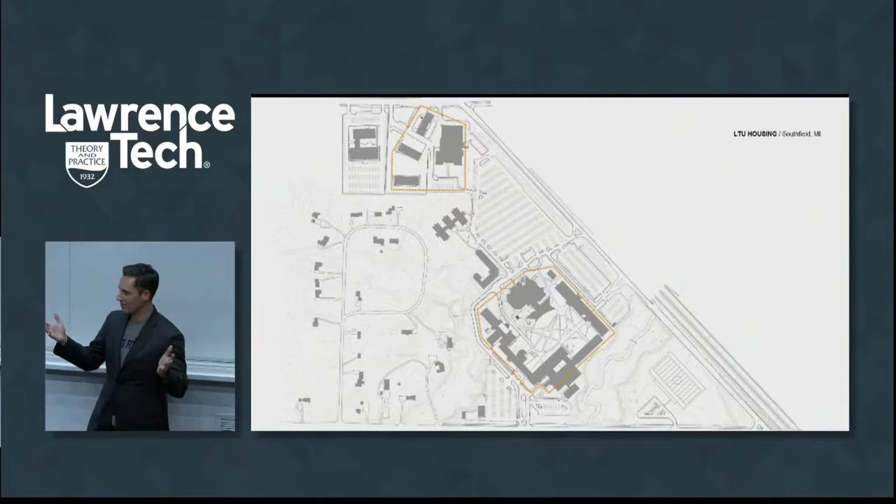But as you go through this, really start to think about what is the future and the process of how we make things. When we think about design, when we think about architecture, when we think about construction, when we think about fabrication, assembly, all of these types of things, you have kind of conventions of how these work, but it is changing, and it's changing dramatically. And what we find is that people like you have way more opportunity to make an impact on that than, say, people like me. I'm actually that age now, so unfortunate, but it's true. I'll probably refer to a lot of things in this that I'll say, I didn't actually do this.

I don't understand how this works, but here's the interface that helped me understand it. So to start with, I did promise that we would talk about the housing project.

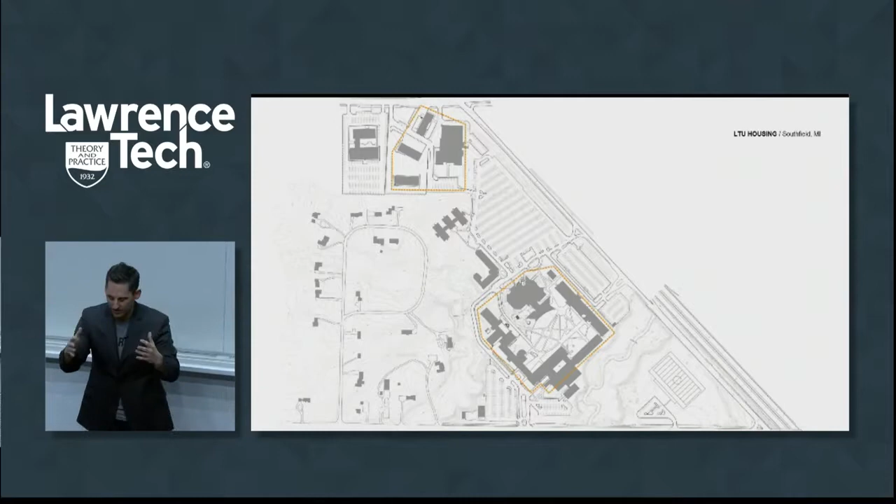Real quickly, just to set the context: generally speaking, when you're dealing with design and architecture in any kind of way, there's a three-part triangle to things. We call it cost, time, and complexity or quality of design. Usually those things have a reciprocal relationship. If the quality of design goes up, what probably happens to cost? It goes up. And if the time needs to be compressed, what usually happens to the cost? It goes up too. So usually these things have a reciprocal relationship.

Well, the ambition for this was we want to be in it in a year and a half. We need it to be really low budget, and we have a really ambitious design for this. So not exactly working with that triangle, but hey, we love Lawrence, and that was a great way to operate, and it was an incredible design challenge to work through. So what you're going to see is the process that got us where we essentially are, and then where it sits in construction right now and why.

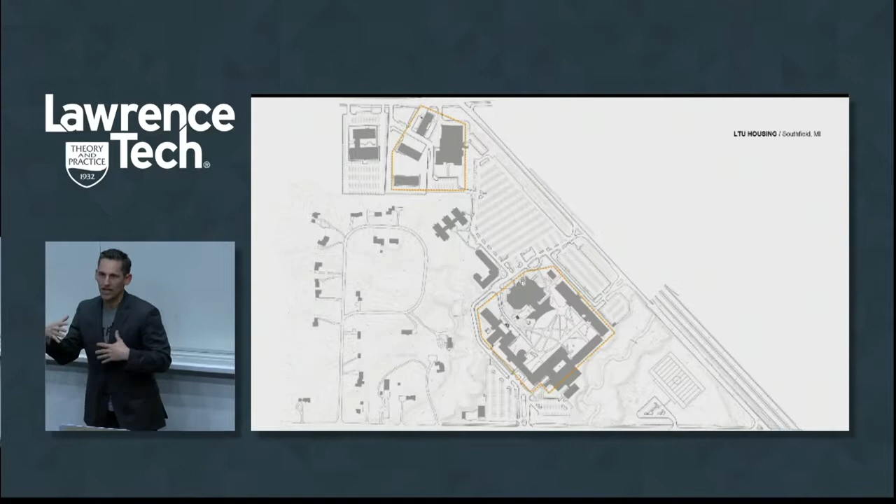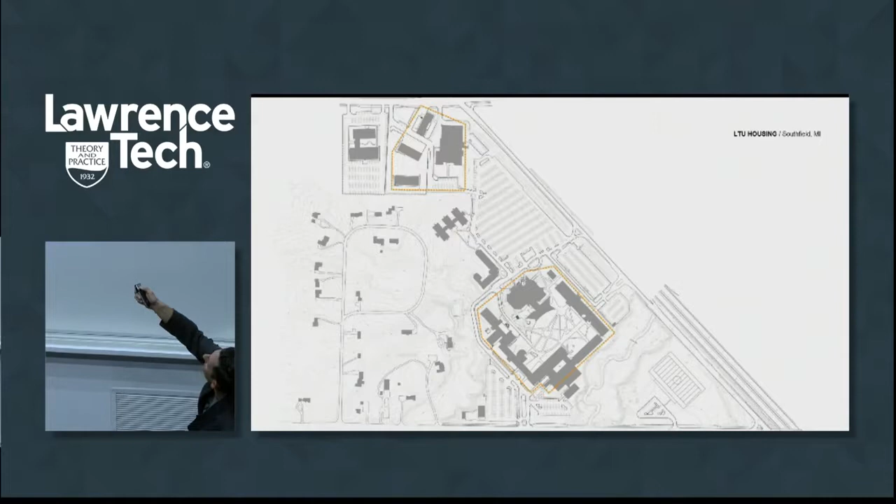To start, we really looked at two components of the campus that were important to understand. One was the academic part of the campus that everybody's familiar with. We called the other North Campus, or ancillary structures. With each of those, what you find in a figure-ground relationship is there's a really nice space that's sort of created within this. There's the potential for it here. But there's this area in between that we were really interested in.

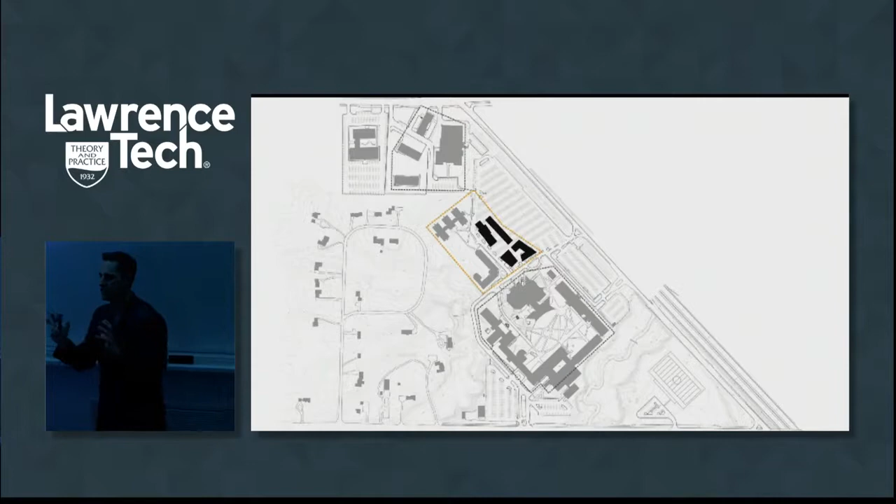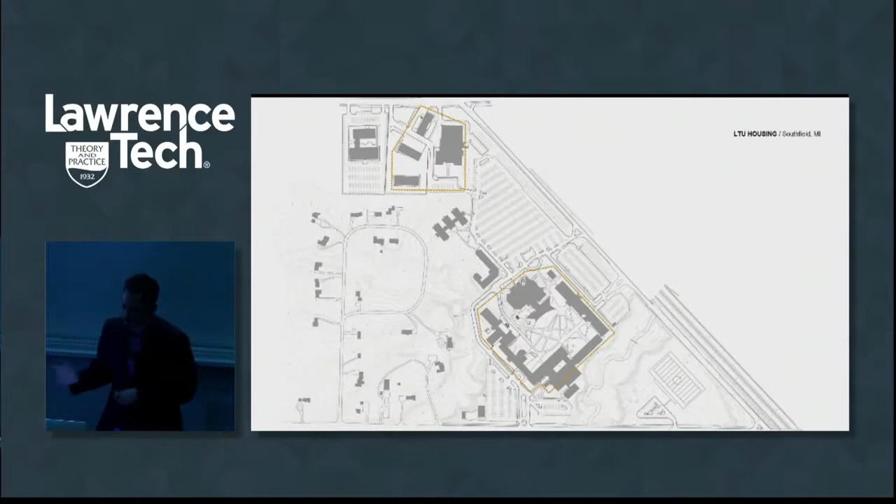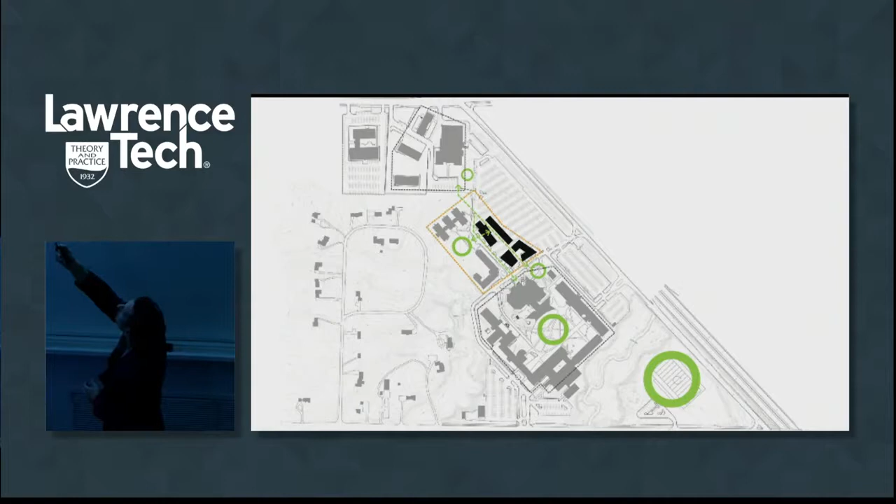That was the idea of, could you create a district for housing? So it's a housing district, not necessarily just two buildings. We looked at the idea early on that there could be a collection of buildings that would connect the academic campus to the future development of ancillary space to the north. The thought was that if we look at this linear relationship, there's strong connectivity from the ancillary part of campus to the academic part, happening through this housing district, and also creating a space for the district so that by adding the third building and creating a space, there's something shared as a kind of public, campus-accessible space within it.

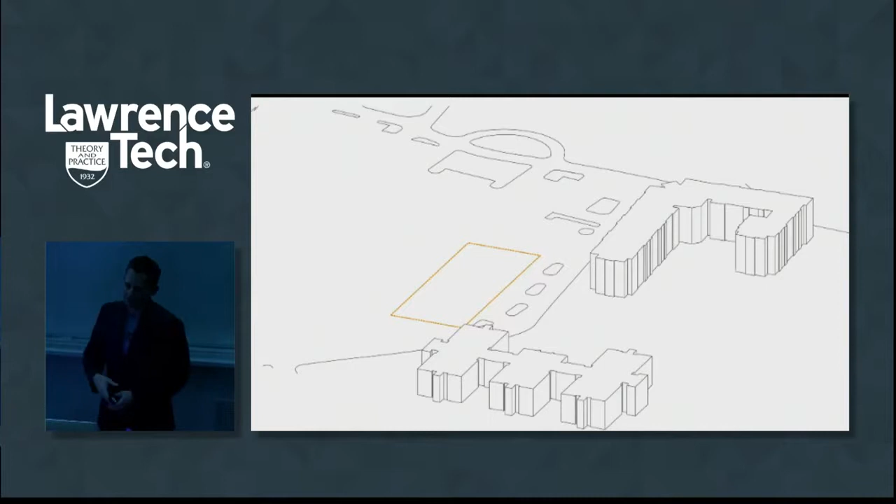So we started looking at locating the building in this area. The idea was that as we project and go vertical, it creates potential for a campus space within it. But we also looked at it being within the parking lot, so to elevate it, to give it a bit of a podium so that if I'm in a residential unit, I don't want to be looking directly out at parking. So give it a little elevation so it has a sense of privacy.

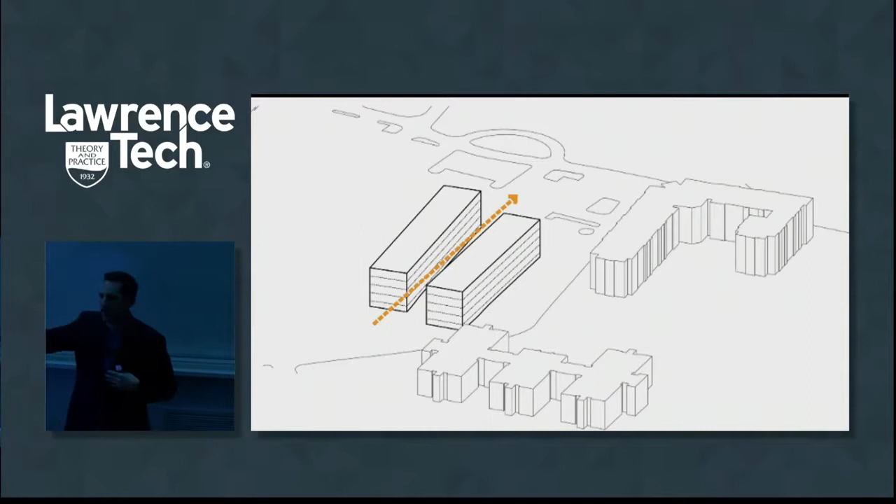And then we looked at the split. You don't want to feel as though it's broken, that you're not able to see or make the connection between the north part of campus and the academic part of campus. So this idea of a pass-through.

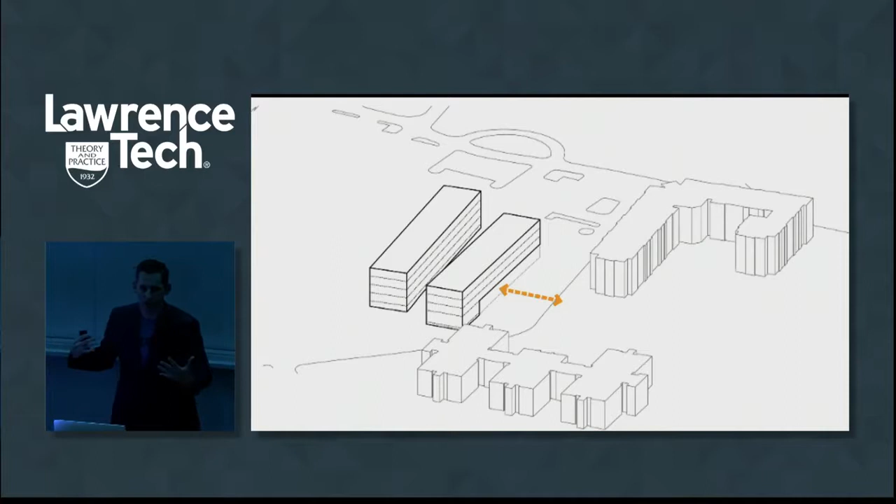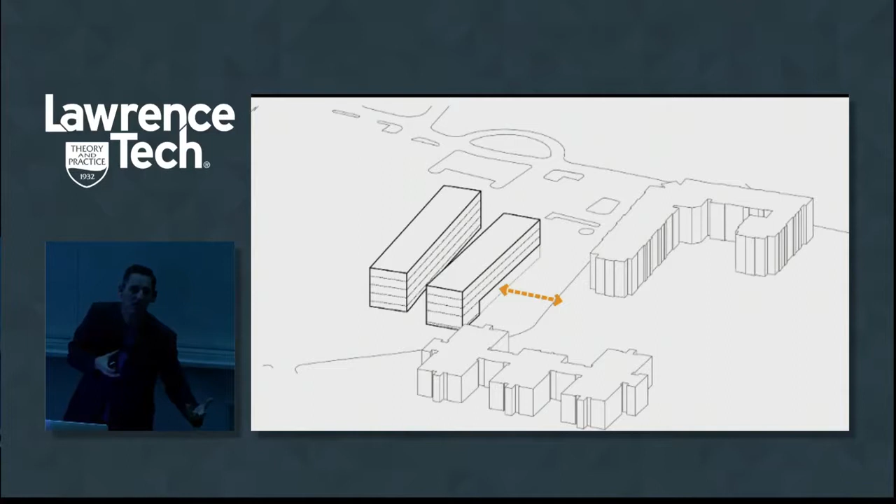The other condition that was really important is there's got to be a public component to this. In other words, if there's people passing by or it's a gathering space, how do we treat the first floor so it's not housing? It really feels like anybody can use this type of space. It's probably not a secret — the football team is coming, the marching band is coming, all these kinds of things. Maybe there's not as much access to the fitness facility. What are other programs we could put into this that could create a dynamic relationship that's a 'used by all' scenario?

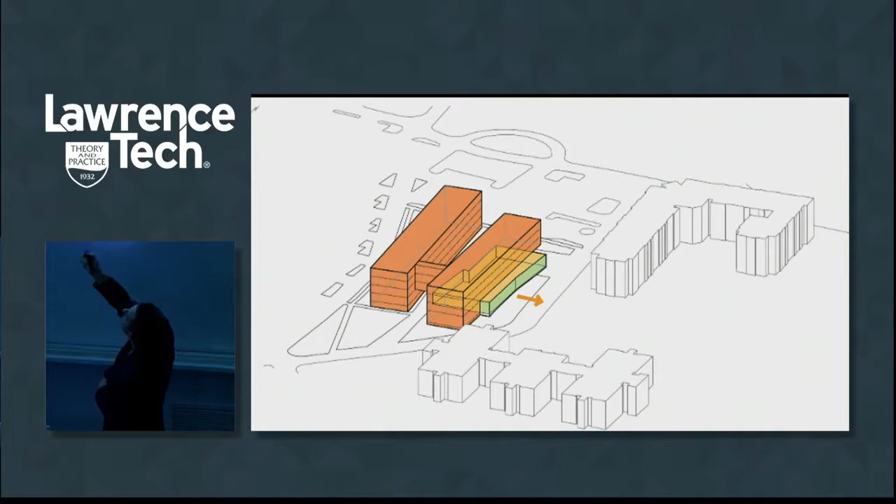That gave us the sense that we take the whole ground floor and accommodate it as a public type of space that can be used by everyone. Then the housing component of it comes in modules up above. I'll talk a little bit about the modules later — that became very important from a cost-conscious standpoint and really maximizing the efficiency of the housing project.

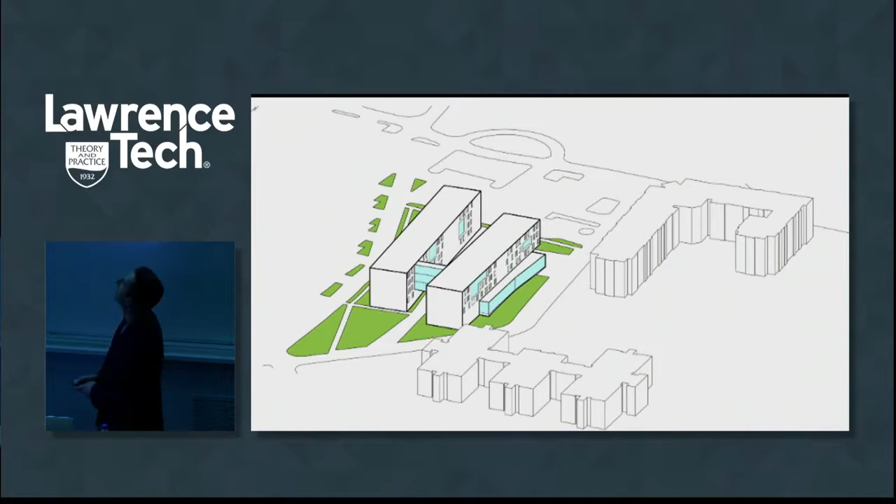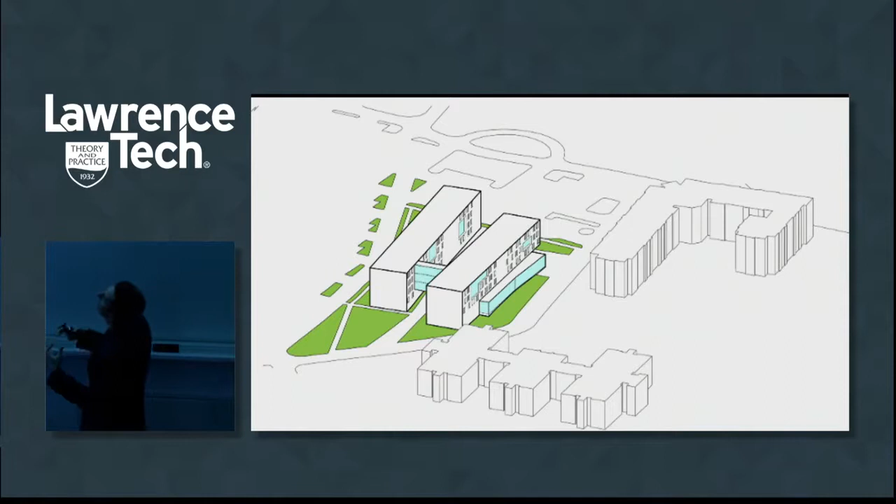From there, what was really critical is, if we're going to have these zones for circulation and moving through to make it campus-like, not vehicular-dominated, we looked at pathways within green space creating public settings so people could gather and move through, allowing the automobile to be more of an urban relationship at the edge, like on-street parking, giving it a more urban feel overall.

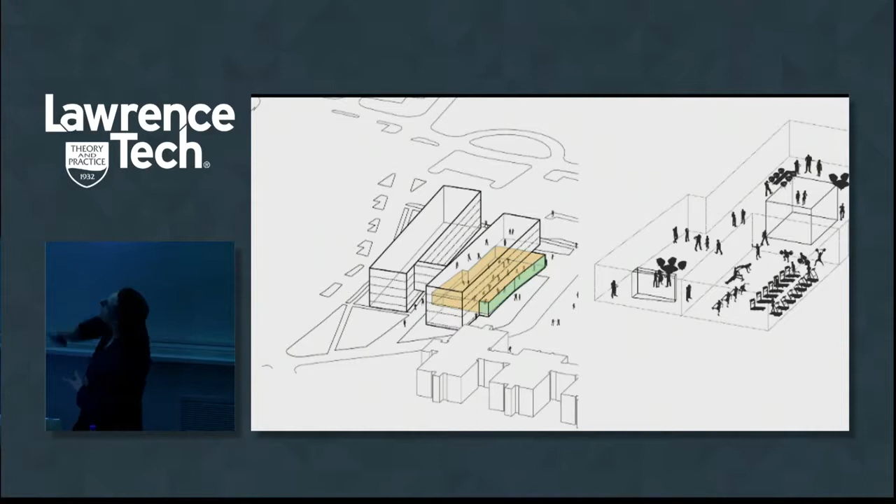We looked early at this idea of other programming on the lower floor—living room type space, cafe type space, fitness center type space. And then, how could we look at other community spaces within this, so that it wasn't just a dormitory but a sizable housing complex? Where are the places that community exists?

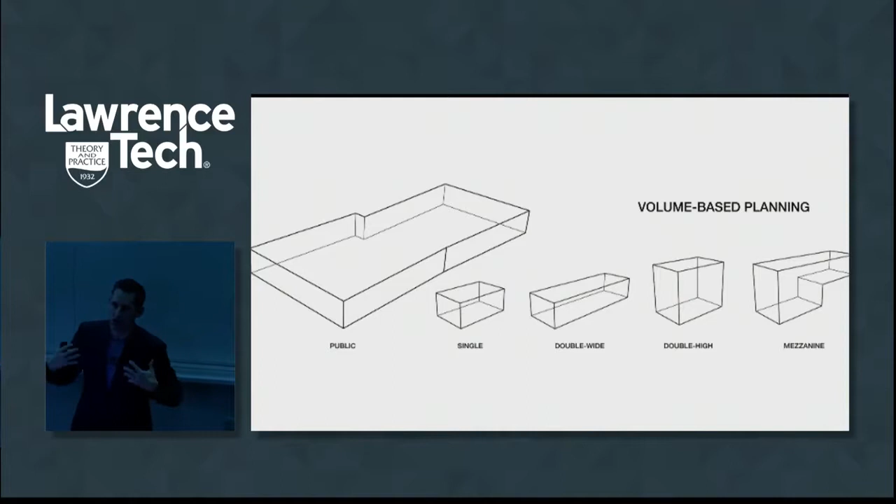So where we started with the idea of a larger public space, we could take bays in those modules and look at single, double-high, or mezzanine type spaces to create those within that.

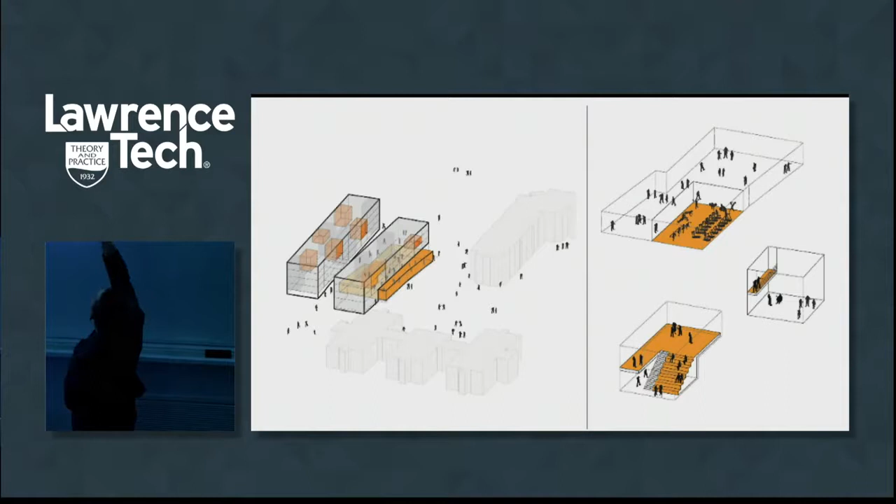So we looked at a series of programming we could analyze to give a lot of differentiation—reading rooms, game rooms, some more active like foosball and ping pong, some more passive like cards. There could even be a space like a cinema for showings, creating a dynamic relationship both within and external to the building, all vertically integrated so you have neighborhoods or groups of spaces between these zones.

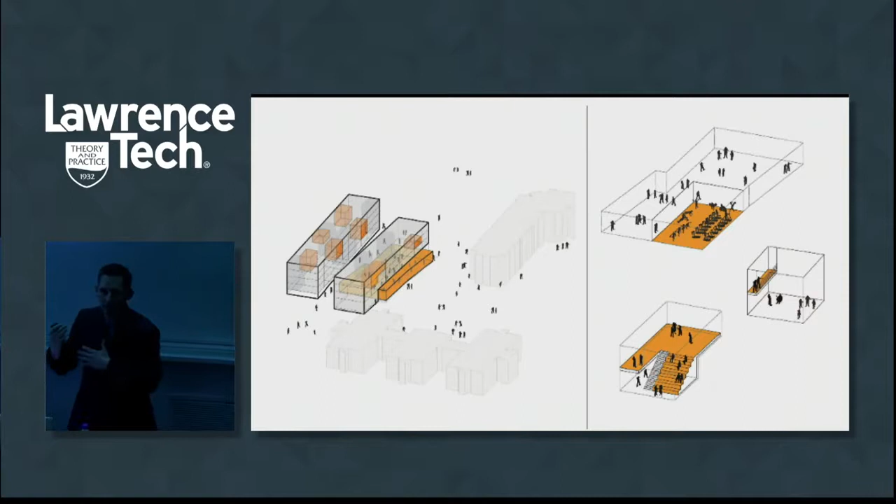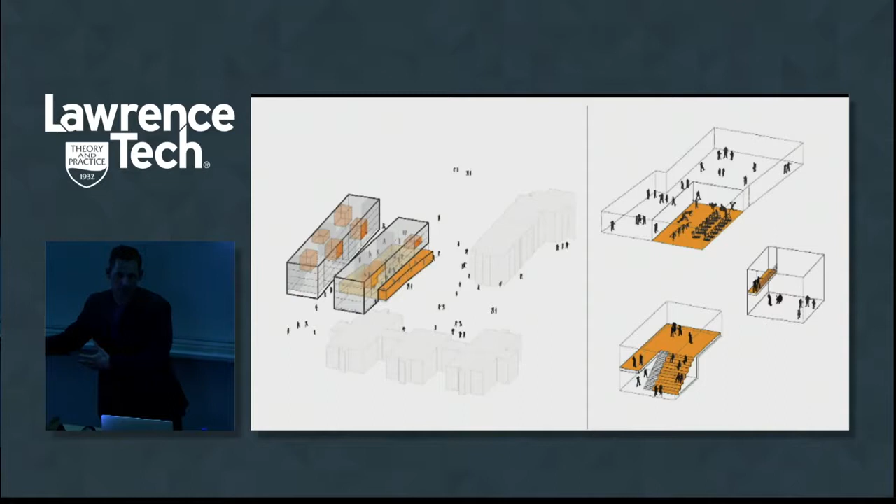It was always the notion that there's never more than 24 beds collected together—you want to know your neighbors, the people around you. So this is almost a city within a city, but with neighborhoods and districts particular to what's there, and the ability to traverse through the building. You might not just be in one part—if my room is here, I might go to the other bar to access the music room community space. So we also look at that from a horizontal plane.

Same idea—there's a whole public lower floor, but this is broken up into districts, grouped in terms of where the housing fits in. A real critical component early on was, if we're looking to maximize the efficiency of this, what is the module?

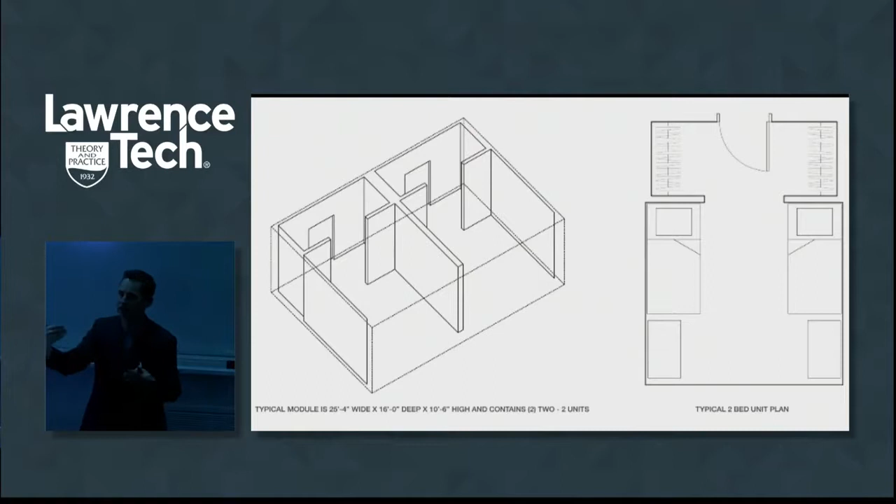This was a given in a certain sense—here's what's worked in terms of housing, here's the maximum size we want to give. So we said, okay, we're going to play with the Lego we were given, and figure out how to look at the assembly of this, but break down the Lego into exactly the proportions and criteria that are there.

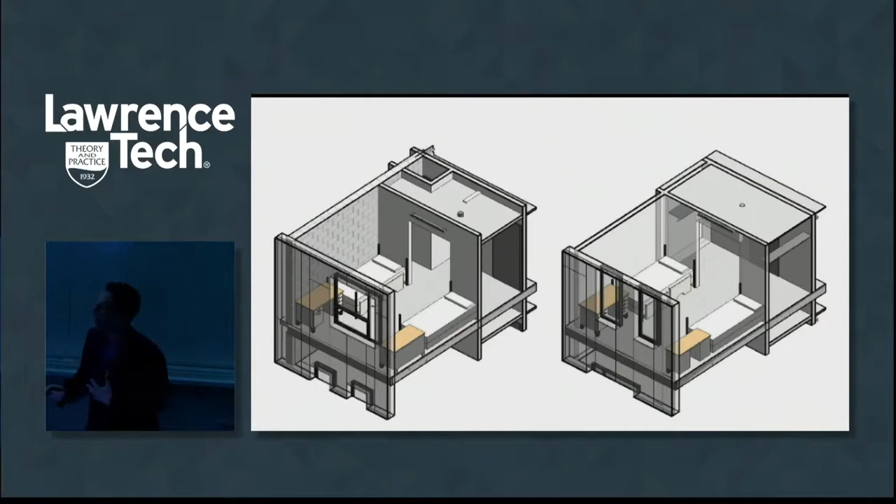Essentially it's 25 feet 4 inches wide, 16 feet deep, and 10.5 feet high, and each module contains two units—so you'd have one and two within this. When we look at these units, we look at them completely three-dimensionally, how everything fits within that unit, and that ends up being the core and the base.

We go back and forth, and this gets into what the future of design starts to look like. We had the opportunity to work with a studio doing computational design to think about how we use this as a tool.

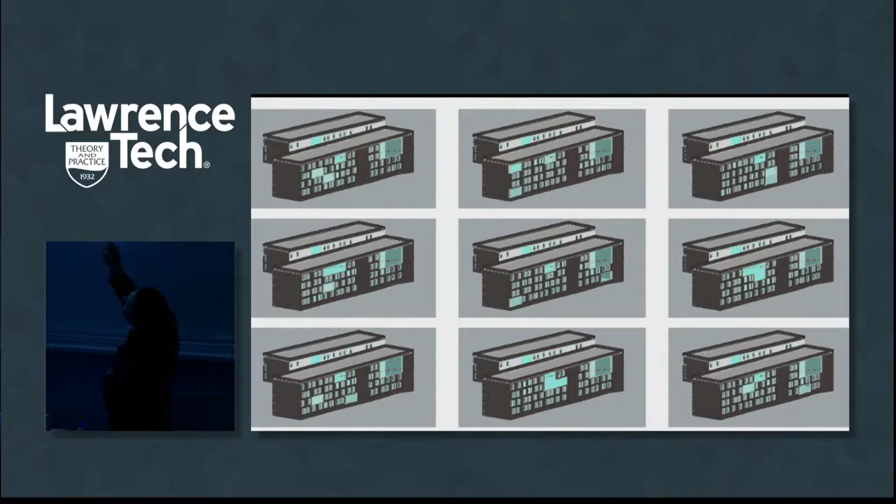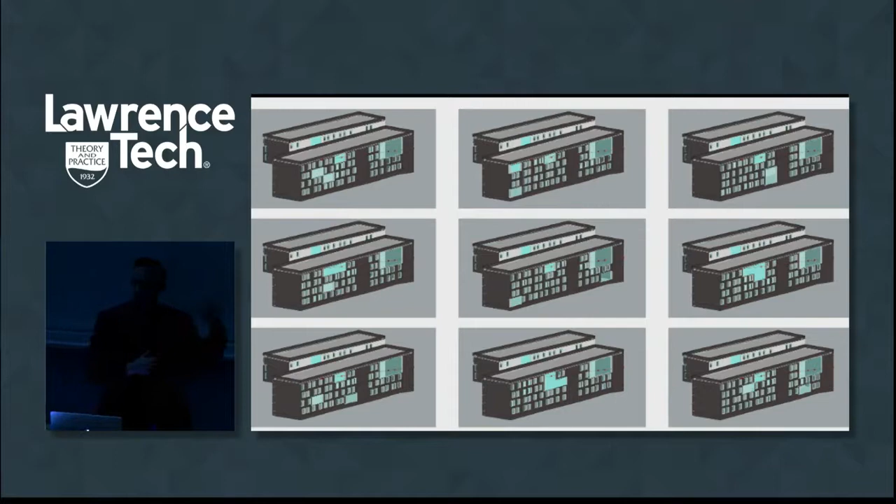We looked at many different iterations—the relationship between these units and the community spaces, how those arrangements work, what's the right proportioning, where they are, so there's dialogue between, say, the second floor, third floor, fourth floor, and the right approximation. So the sense was there was essentially—hopefully I can get this to run.

Went really dark, there we go.

There's a series of iterations with rules. We never move outside of this core or this core for a stair, but everything else is open for interpretation. Working through that, you assess the best places for these community spaces to stay, and from there, within the modules, we have the 25'4" module.

In order to be cost conscious, there are 2 types of windows: a more square window and a split. It's set up so that the right proportion relates the square windows to each other, a single and a double, within a 25'4" ratio.

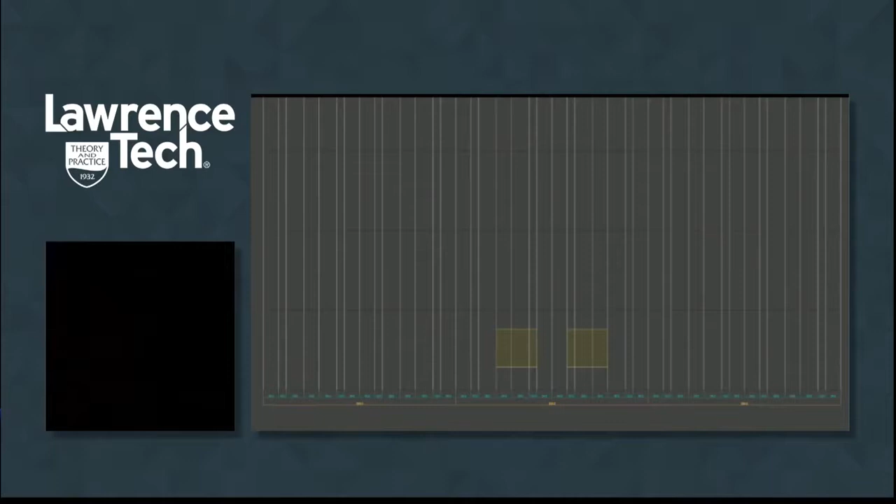If you look at all the vertical lines, that was approximated to right-size the metal panels, so there are only 3 different sizes of metal panels. We build in this rigorous system, and then we can look at the manipulations within it.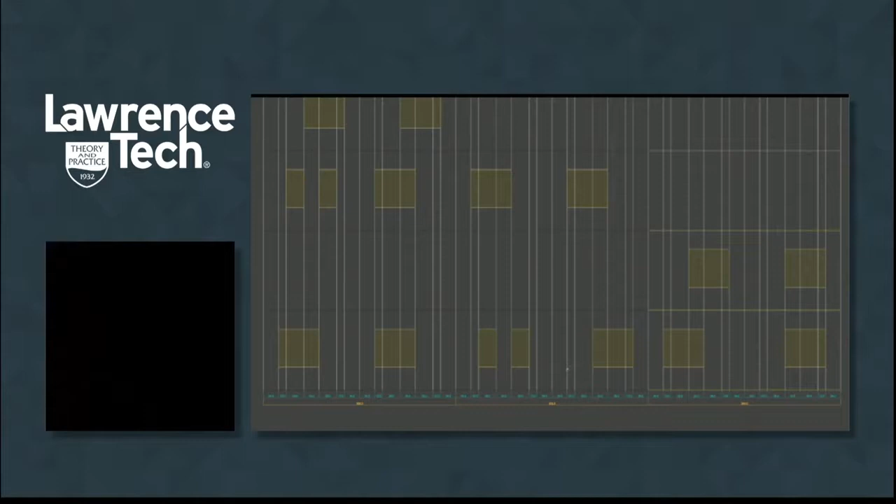You don't necessarily feel the reading of this hard grid, but everything is within this modularized surface, and we can apply that across larger areas to see the relationship and exploration that gives diversification to the facade.

From there, we look at the culmination or aggregation of all 4 facades. One important thing is that the modulation of those windows takes place outside or around what these community spaces would be.

This neighborhood can be modulated and moved apart in its direction, and each facade could be controlled in its own environment, subject to one another.

We can also apply parameters to these. If we need 60% window type 1, we can move the needle there. Or if a contractor says it's cheaper to go more of these, we can manipulate whether it goes up or down in percentage as we look overall.

We can also look at the amount of glazing on each facade and the percentage for daylighting. So there's a lot of modulation, giving you repetitive iterations where you take more the position of analyzing things than specifically designing one iteration after another.

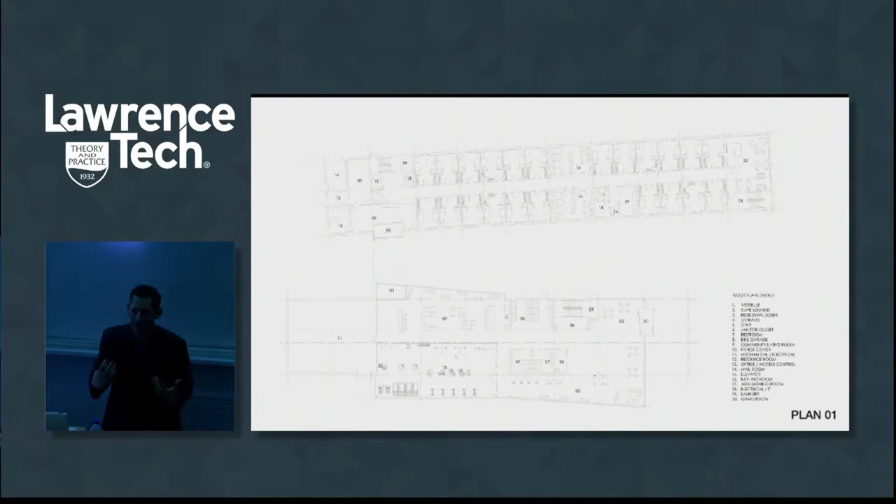This allows the computer as a tool to give you multiple things to evaluate, as opposed to just your priority or idea ahead of time. More importantly, we can put certain performance parameters into it that we can measure to look at how effective it can actually work and perform.

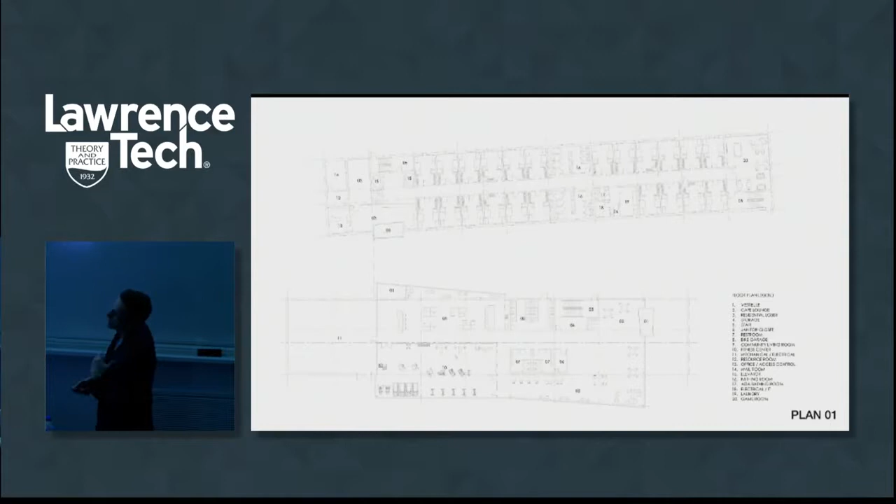We'll talk more about that, both in terms of cost and performance, as it relates to some other projects. Just quickly through the plan to give you a sense of the lay of the land—this is north in this direction, and the academic campus is in this direction.

The main entrance leads to this ground floor, which is the fitness center and public space. This is kind of residential space with kitchen and living-type spaces, then an entry off the courtyard that also goes into the dormitory. This is all at grade, but there's a small topographical change where, when you get into the housing, it's up.

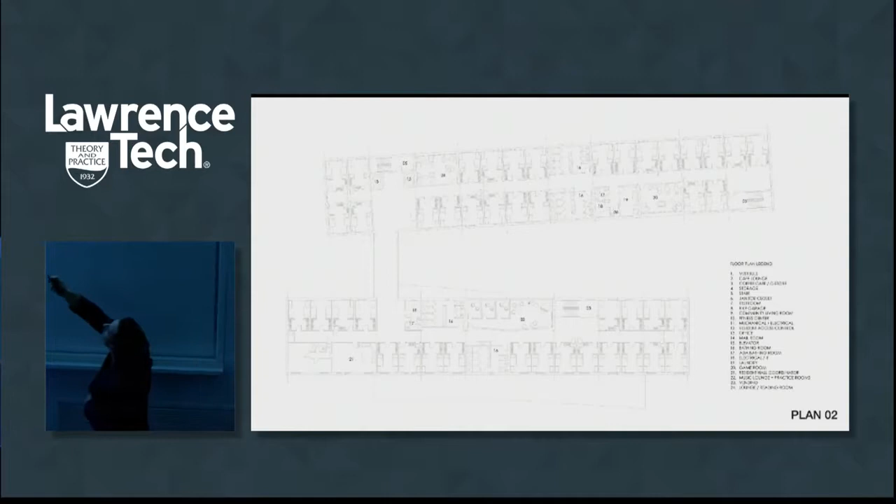The other important thing as we move up is looking at the community spaces as they sit within this—there's a lot of diversity in the types of spaces: music and individual practice rooms, collective spaces, game rooms, and reading and social spaces.

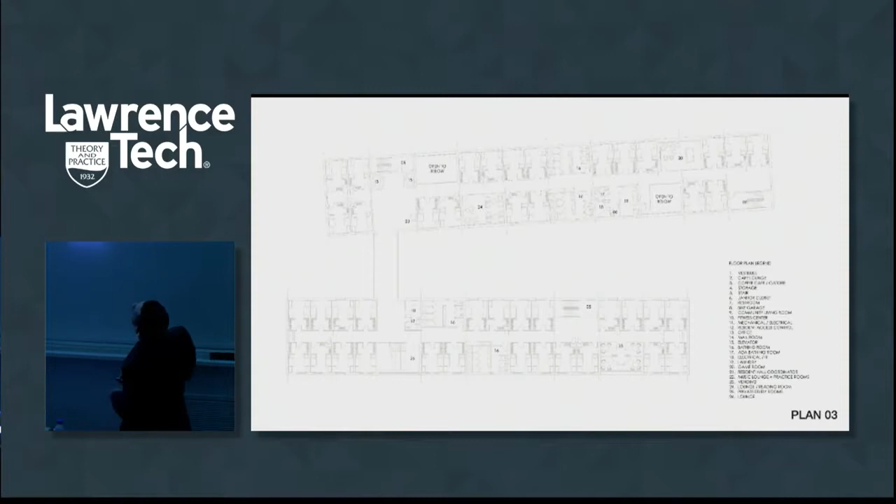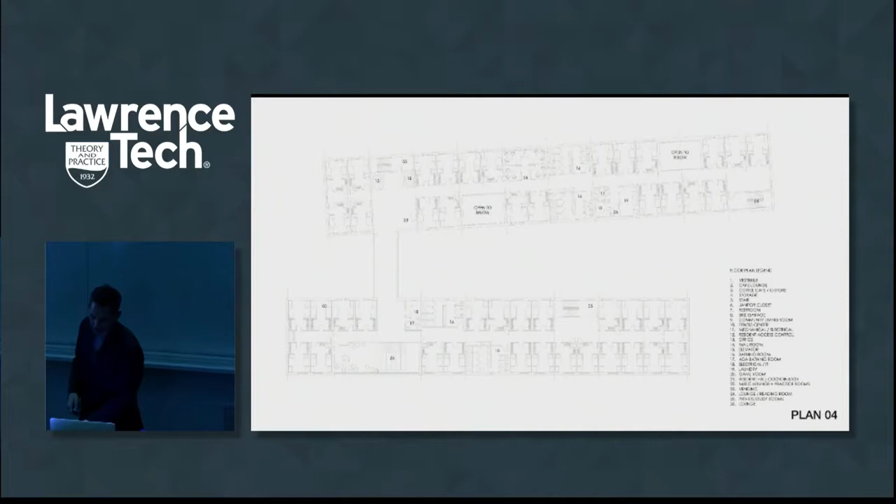The idea is that as you move up, you have an open-to-below so there are opportunities for the second floor to connect to the third and fourth. This becomes a critical piece, a larger span over to the mezzanine-type space that gives the terrace seating the ability to have films, lectures, any social events, and just hang out in that seating area.

Really looking at giving a bit of grandeur to the entry so it feels very public. The idea is that it would be all glass, opened up into that courtyard or green space between all three housing areas.

And then really denoting this idea of entry with these yellow boxes. The other thing you might see is we've treated the exterior envelope with a more cost-effective type of material, but it has this idea of enclosure. As it comes into the interior, it's more private, intimate, tactile.

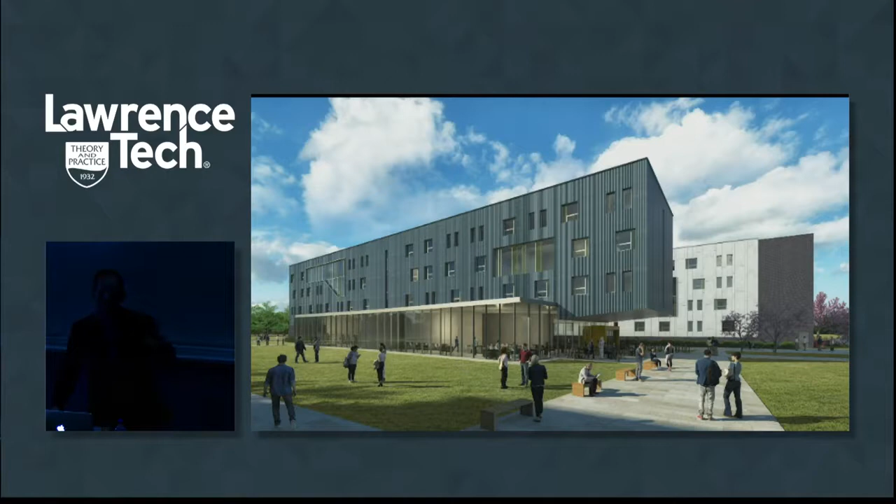So the material quality is raised a little bit, giving you a sense of intimacy within the interior. The cantilever - we'll talk about this - we were looking at structural systems and what's the most efficient way to do it. So you get the good and the bad. We show you the struggles and the things we went through as we evaluated this project.

When we first looked at this, we wanted to look at glulam timbers and CLT. Essentially it would be all wood framed all the way through, with exposure of wood within it. Interesting aspect is it would end up being columns and beams, allowing the planks to run in this direction, which means we're free as we go from space to space - we can move and we're not locked into something.

One of the things that's very interesting is we tried to competitively work structural systems in, and the timber was becoming competitive. But there are so many outside parameters that affect this. What was fascinating is as we got closer and it looked like we might be able to deal with the premium, it was actually the insurances on delivering and erecting the CLTs that ended up making it not cost effective at all. So sometimes beyond the parameters of what you'd even think, just because there's a lack of familiarity.

I think it's one of those things where we want people to understand the impact of how you have to make decisions, and where they are is sometimes outside of you - if you call a vendor or anybody else, the cost implications may not be as clear as you might think.

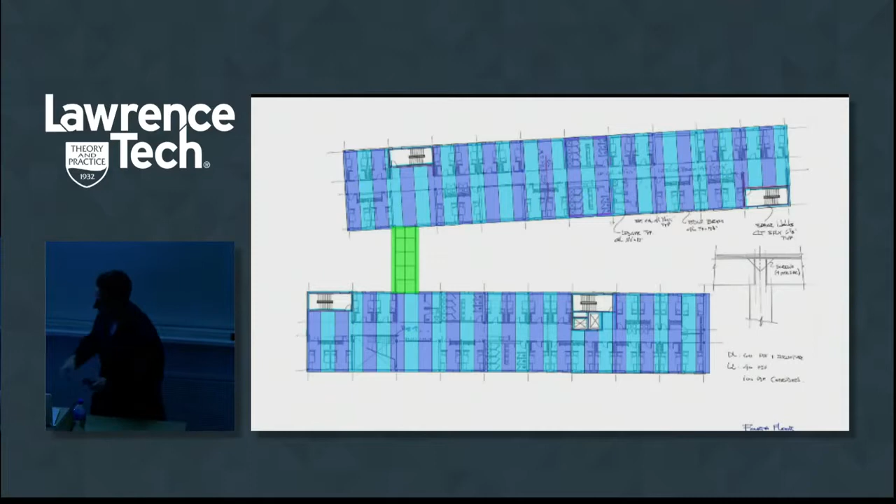Again, the idea that it spans essentially north-south, or east-west within each one of these walls. But then where did we have to go? The most cost-effective solution we ran into was block bearing walls with concrete plank. You see this a lot in different housing types. But this had to be a hybrid situation because that ground floor couldn't bear having all of the masonry walls in a regular pattern.

As we look at the erection process, you can't see it very well, but essentially from this point forward is all steel, and you can see the steel move up within this area. The reason for that is the cantilever you see on the end. So the structural steel moves up, and it was actually an intelligent idea by our structural engineer to look at plate girders on the roof, so we didn't have so much spanning and girder trusses within the fabric of the actual spaces being utilized. So it didn't inhibit door openings and things like that as much as we would generally see.

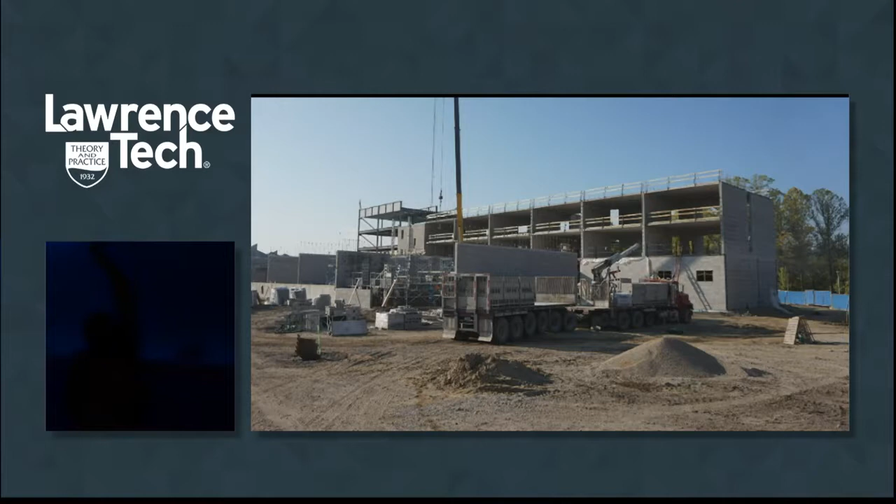And then additionally, you can see here's the modules that are broken up, and the idea is that there are two sets of rooms within each module.

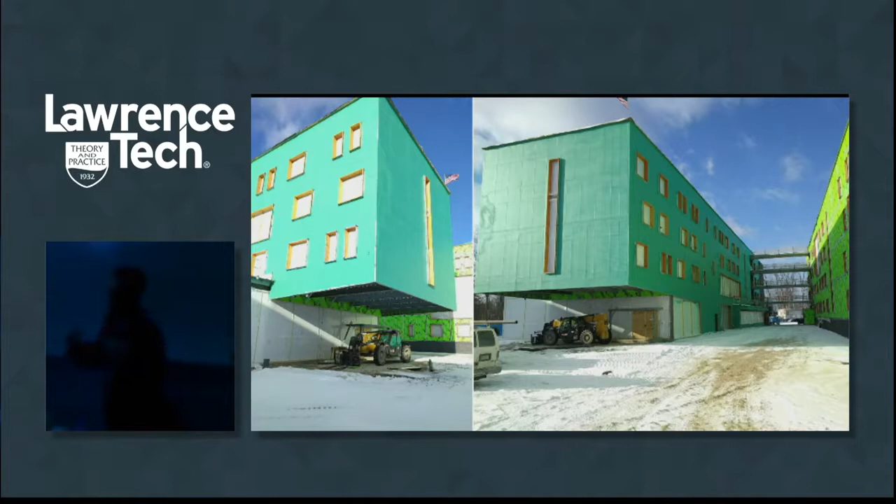Again, as it's starting to be clad, the girder trusses just disappear in behind it, but it gives us the ability to really have all of this being open, particularly so you have the ability to see into open public space, and it's very accessible such that you can have program space on the exterior - so you have that strong relationship between interior space that's used and exterior space that's used.

And then also that kind of transition as you go more towards the courtyard, giving you a very different read and feel within this. The idea was that it's not just a conduit to get from one part of the campus to the another, but also a place to sit and be peaceful and more serene. It was interesting because we were having a conversation earlier about what's the right kind of proportion or scale of this.

And as it's been erected, we think that it's come together very well in terms of a very intimate type of courtyard, but then also having a very interesting relationship between those public spaces that are then looking back onto that. It adds a kind of dynamic to it.

And then looking at even the relationship of, say, the very public space that's here, the music room that's within this zone, but also treating things service-wise like laundry so that you get the connection of, hey, this is vertically where all of these service things are kind of collected. So the laundry is, in a sense, predominant.

We're also providing natural light then into the laundry rooms that are there. This gives you a little bit of that sense of what the interior of one of these spaces might be, where there's rooms within this area, spills out to a common space, and then is open effectively to the floor below. So again, it's very strong in its conversational relationship from one level to another, so that the idea is that you're building communities, groupings of like 24 students, but then you also have the ability to cross-pollinate both on the horizontal plane and in the vertical plane.

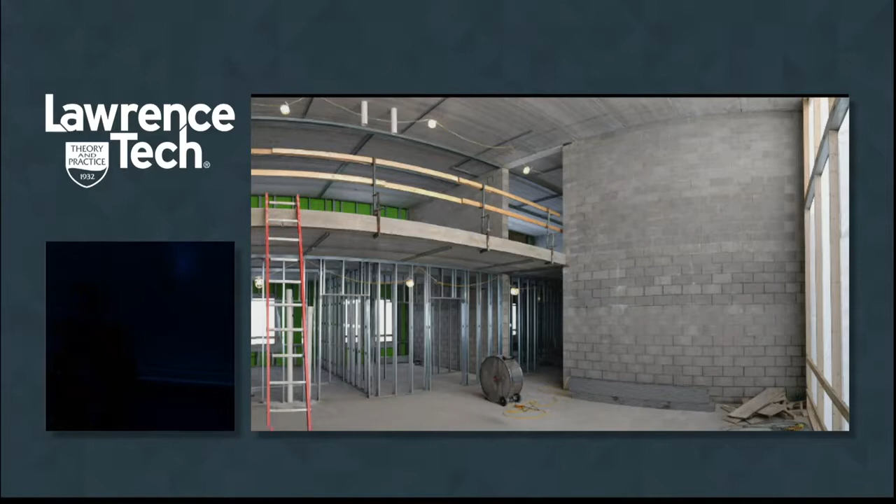This gives you a little bit of the sense of the intentionality of looking at a very active game type space. So it's more along the urban or southern edge of the campus. As cars are coming by or people are looking back, you can see when there's a lot of activity happening within that zone.

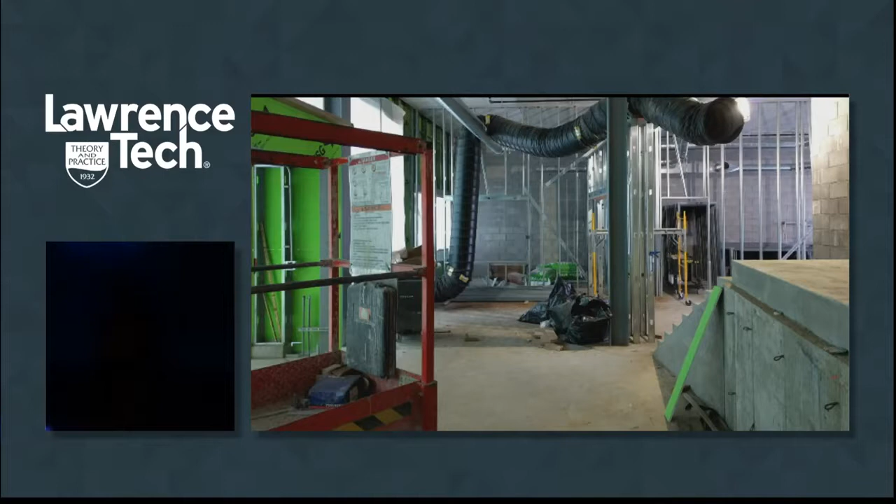At the same time, there's a little bit of elevation deviation there, and that affects essentially the entry, where you would come in at grade, a small stair effectively there, and you sort of stare up and have the ability to have that elevation change. You think of it a lot like the way row houses work, right? So you step up and you can see the activity that's all there, but you have that sort of private zone that you actually live and reside within.

And so you sort of read the base of where that exists, the idea that there's that very public active game space within this zone, a more passive game space within this zone that connects again third and fourth floor, the study type carrels that would be on the fourth floor, and then again a more private, quiet reading space that connects both the second and the third floor. So again, very diverse types of spaces that exist within it.

And then collectively, it gives a very strong reading to the idea of 10 Mile, of Southfield, or the service drive, so that people get a real feel of the activity of what's happening within the residence, while still leaving the individual rooms as very private things, because you're not seeing it at the scale of the individual housing rooms.

You start to see from a distance the more larger scalar components of the community rooms. And then really, the largest kind of community rooms speak to that kind of public space that's created on the west side, and then the dynamic of—you can't tell now obviously because it's Visqueen and not glass—how it would connect to that public space.

So as you're walking along, you're seeing the activity that's there: coffee bar, fitness center, kind of all of the activity that's really within that zone. And then again, coming back to the idea of that mezzanine space and what it means in terms of a volume that's effectively accessible. At the same time, it's still driven by this idea of the rigor of exactly what the structural system is, being the masonry walls and the concrete plank.

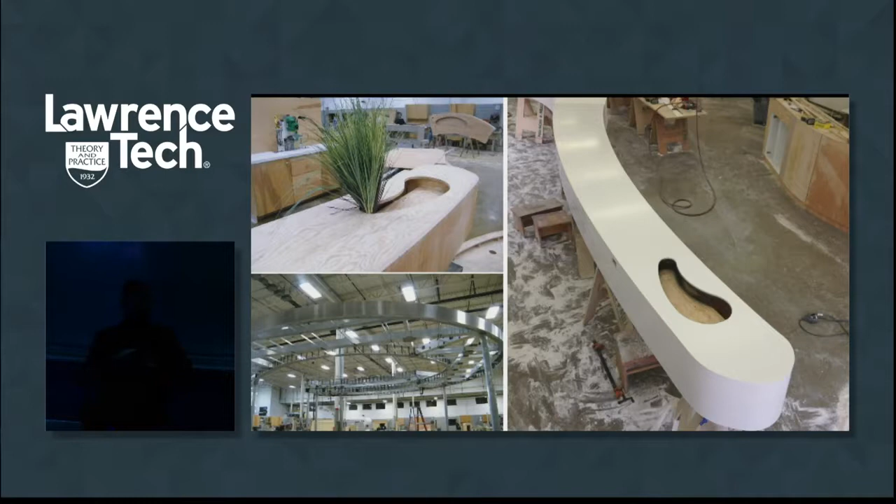So if you're familiar with this at all, this is the Illy Coffee Bar in the McNamara terminal. And this was kind of our first foray into really conceiving the idea of digital fabrication. I show this just to give you kind of our starting point for this. Effectively, this whole thing was sort of built within a factory, disassembled, and then brought back on site and reassembled.

So what are the advantages of something like this? Many, but in particular, you're building in a very controlled environment—I'm not bringing raw material out to a site and working within the elements. I have the ability of manufacturing tools that are there, clean rooms, comfort of people who are working there, eyes on everybody who's doing things in a controlled environment, as well as cost control within those.

I'm not subject to the elements and all of the things that are there, and there's an incredible level of accuracy within that. You're also able to work in a way that's much faster, so some of the obstacles that come in are related to delivery.

How are you dealing with the assembly phase of it? So we really look at it as there's a certain level of fabrication, and then the assembly goes in.

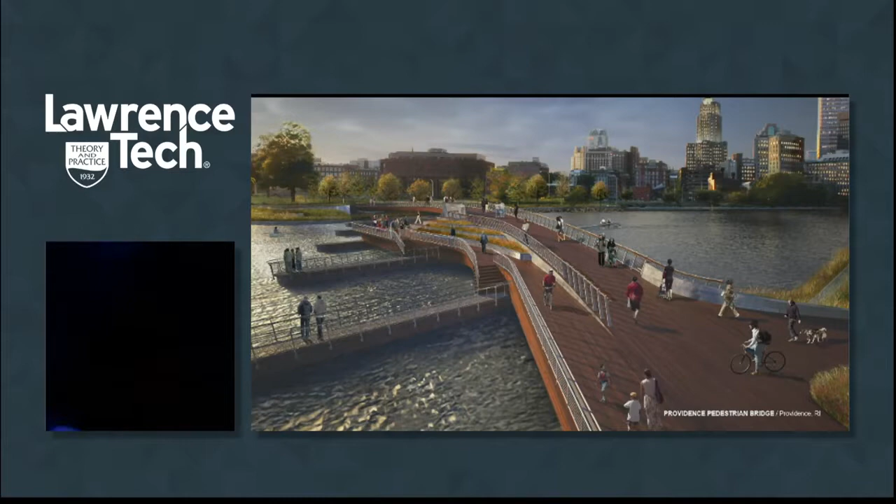What was exciting for us was to be able to scale this up, and this was scaling up a lot. This is the Providence Pedestrian Bridge in Providence, Rhode Island. This was actually a competition that we won in 2010, and sometimes, where time really compresses you, this gave us a lot of time to add things in terms of technology and thought process, how we would build.

So initially, when we looked at this scheme, I'm not going to talk so much about the design, but just to give you a sense of it, there was a lot of directionality. There's the east side of the river, the west side of the river. Brown University is over here, Fox Point neighborhood is here. They have the Riverwalk within this area they're calling the Knowledge District that they want to expand to, with a kind of proposed boulevard known as Dorrance, and then the Riverwalk here.

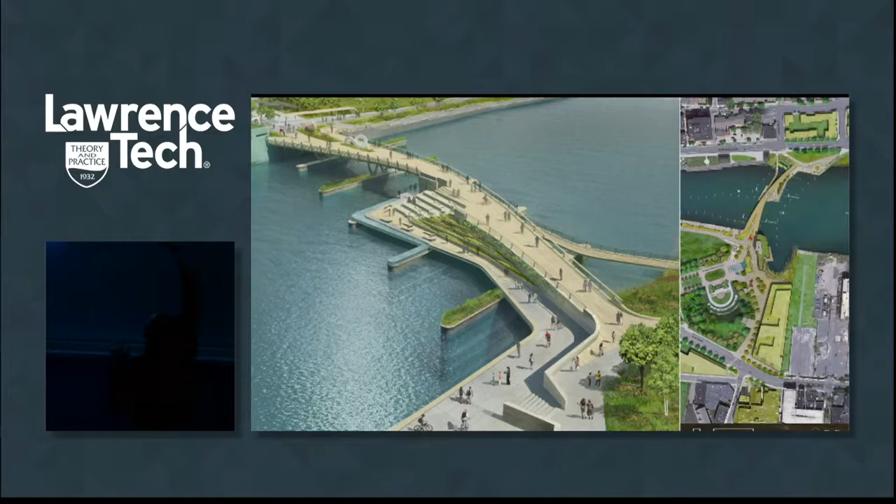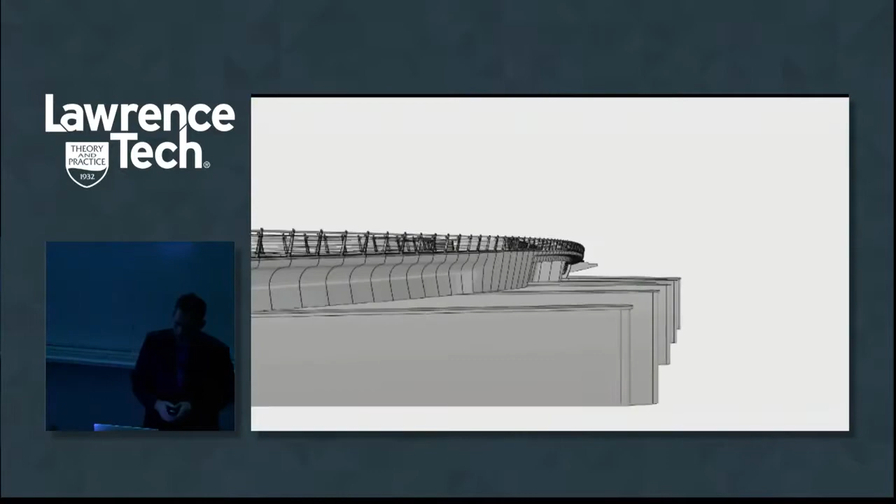So you get a sense of all the directionality that this thing wants to move, right? They also had this heritage of shipbuilding, making, and jewelry. So there was a lot of sinuous relationships built into the overall form of this, and then really working with the idea of wood.

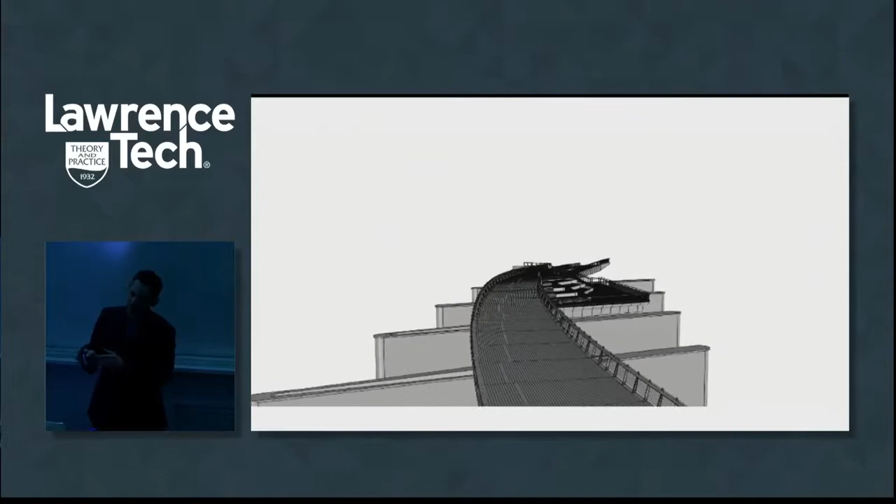So what this is illustrating is the overall model, done in Rhino. You get a sense of the sinuous nature of things, some of the complexities of double-curved geometries, so that it has a very consistent movement as you go from one place to another. It allows you to deviate in directionality and yet still maintain a holistic integrity. It never fractures, it never creases or folds — it's always a very sinuous movement and bend.

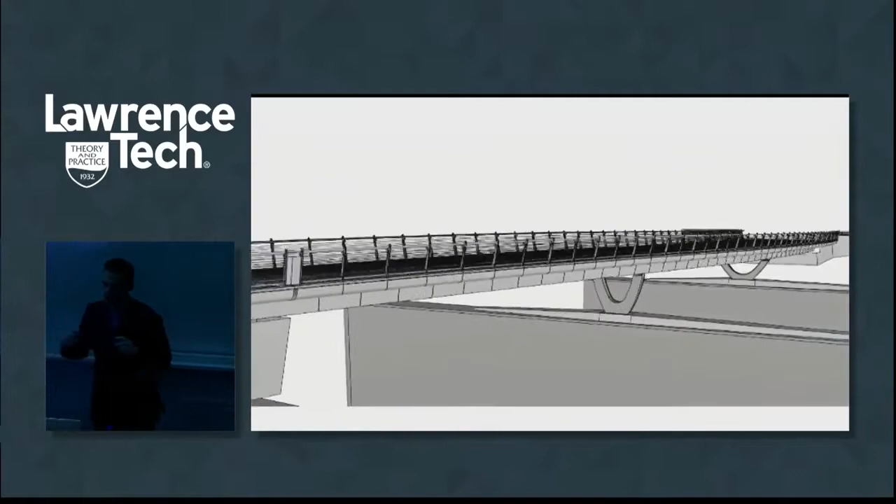So the idea behind looking at this was, how do we even construct something like this over the river? What are going to be the challenges in doing this? And so what we came up with is the idea of taking a process of digital fabrication and working with essentially a subcontractor — the person who got the job is out of Brooklyn in the Navy Yards.

And what we were able to do is work with them in such a way that we would give them the Rhino model of what you're seeing in the wood here as the deliverable. We wouldn't draw all of the drawings for constructability. So in thinking through that, there were really two models put together for this, and I really want to make the comparison between what worked well and what was difficult — because it was surprising, shocking even, at a certain level.

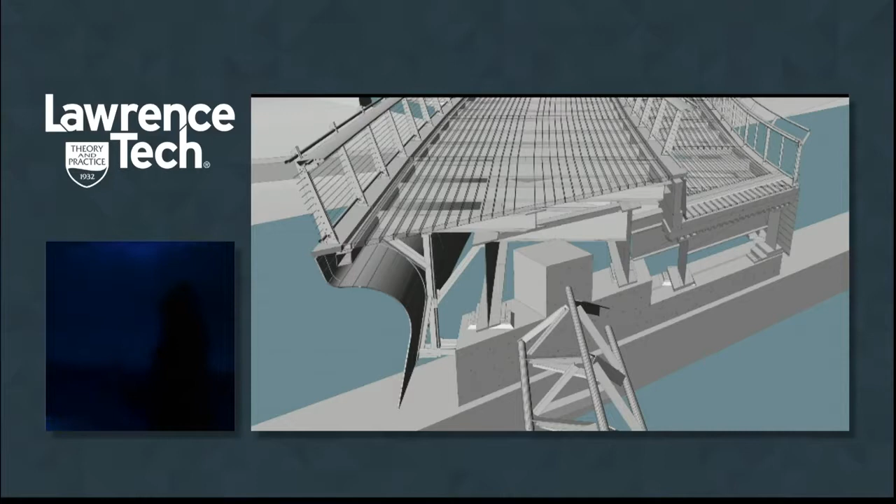So essentially the primary structure — you saw sort of two zones. There's the clear span, and then the other part that looks like it has the hull or the deck that comes closer to the water. So within the area where the hull comes closer to the water, there are two systems.

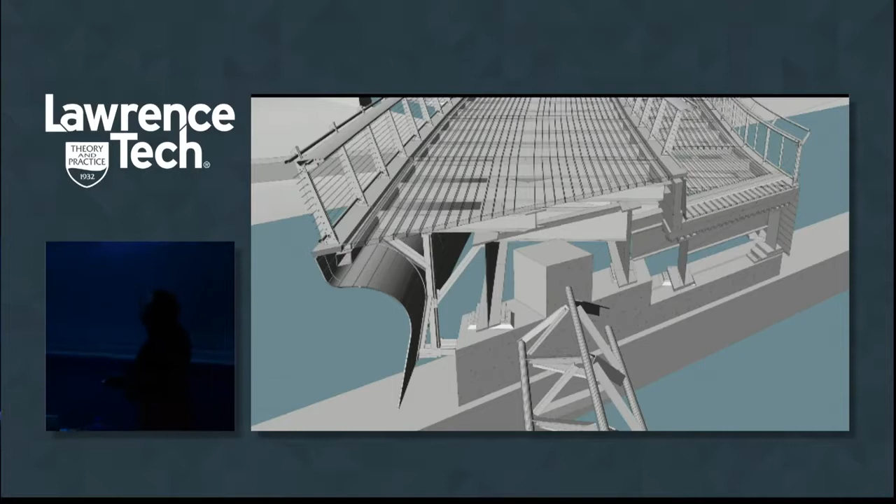One is a Revit model, which is essentially all of the primary steel within it. The other is the Rhino model, which is essentially the skin or wrapper that comes around it. As we look at this, you can see the kind of deviation between the amount of structure happening within the Revit model. That was all done in terms of conventional construction documents — drawings sent out, the steel detailer sends back drawings, we get approval. I can't tell you how painful that process was.

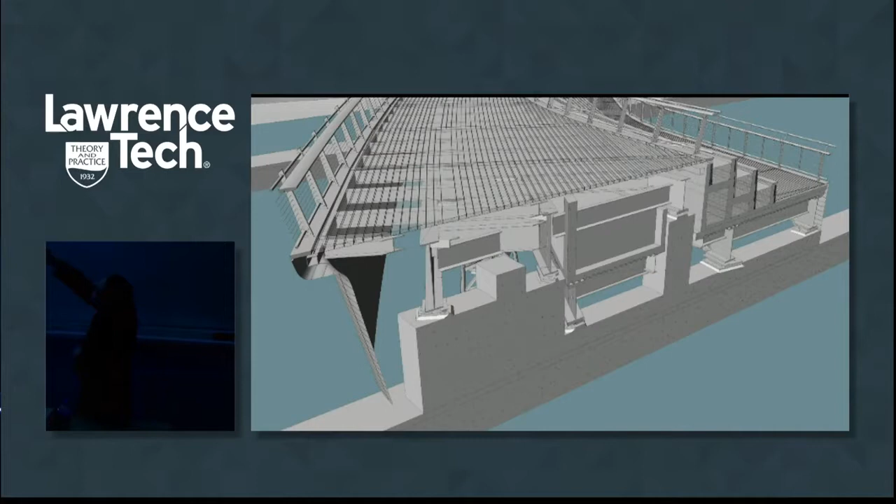The amount of inaccuracies — this doesn't match, that doesn't match. I mean, it was a lot of Excedrin, predominantly for Corey. I feel bad for the man. Just an incredibly painful process to go through. We were almost nervous about what this was going to mean for the skin.

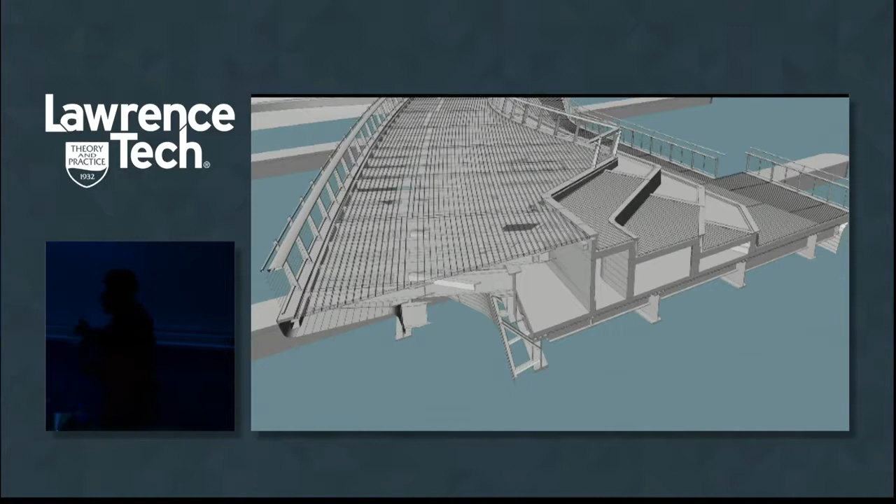And now we're kind of advancing into new territory. You see the different layering that goes into this, particularly as it goes back for the busker terrace and other components of it.

So what was interesting is that they're still making them in sections. This ends up being the more conventional construction side of things, where they're taking them in bays and essentially supporting them from pier to pier. And you see the kind of movement that's happening there.

Interestingly, the south side has a much more tapered, thin edge to it, while the north side is quite different, with a thicker edge, and then obviously all of the manipulations in between.

This is a Department of Transportation project, for Rhode Island DOT. What we're trying to do is accommodate this very unique process in something where they generally just build highways, so this was a very different process to go through. The conventional method of things, although challenging, was the way they do things.

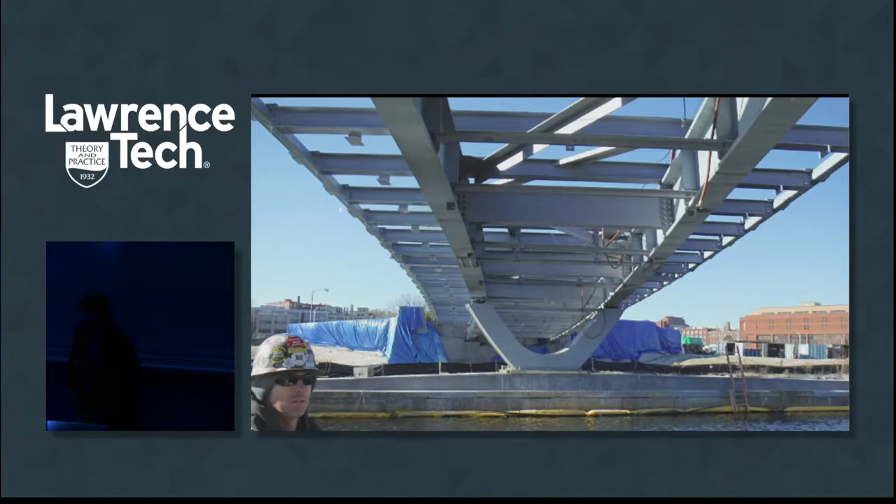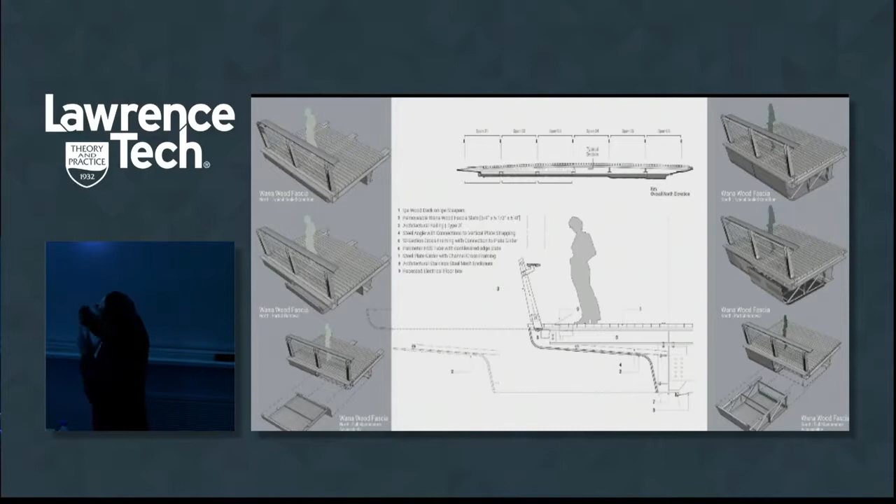As we start to think about this, essentially each of these slides onto the bridge. You can see the thin area on the south side, and then this would be the thicker area on the north side, with a lot of transition happening as you get closer to the hull.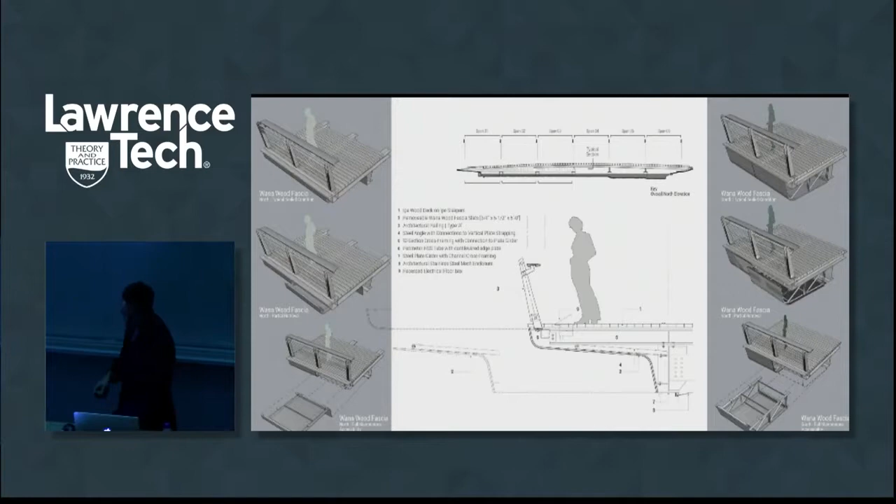So the idea was, let's prototype or mock up a little of what this would be. It was essentially developed as a series of slats in this kind of 5-foot section—shout out to the Make Lab here. Zuby actually came in and had these routed out of foam so he could make a prototype and bring it back to our office.

You can see the early prototypes of what they're doing in the manufacturing process. Effectively, what we're really concerned about is this area, that line, that kind of skin, and they take care of everything back from there.

So what it allows us to do is be very free with however you want to work through the fabrication detailing of this—you'd have secondary or tertiary structure attached back to the primary structure, but we can effectively be within 1/16 of an inch over 330 feet tolerance for where that wood is and its relationship from one piece to another.

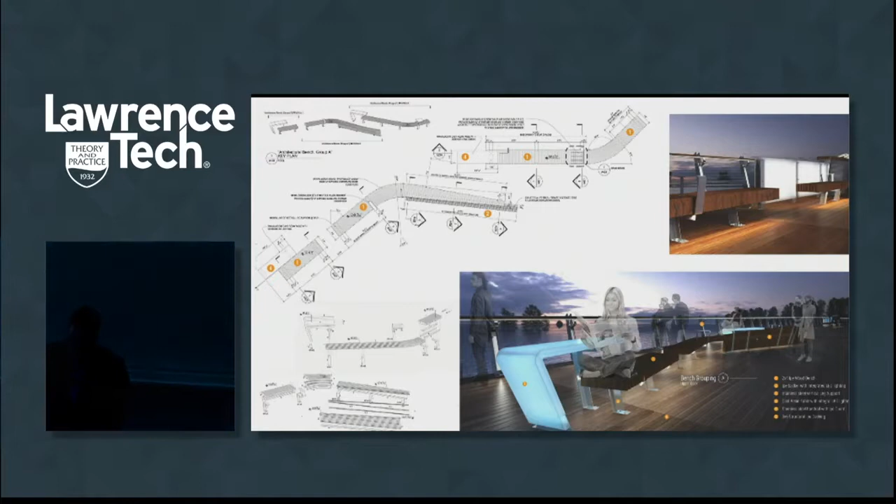That also parallels the idea of furnishings and things like that. You can see it went back to more conventional detailing—every little piece, every measurement, here's all the assembly, those types of things. So you have all three of these things paralleling themselves in terms of fabrication.

That primary steel is being installed still now. The wood is going through its initial periods of fabrication, and the steel is essentially being fabricated all at the same time. But because we can rely on and count on the tolerance measures, they can all be built simultaneously and then installed because they'll be so tightly aligned with one another in the end. It's really been a fascinating process.

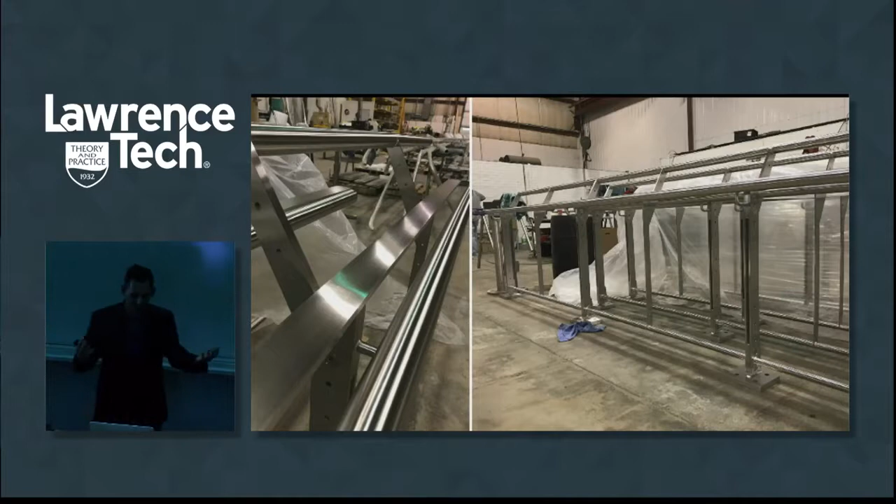I think as we started to look at the wood skin, it was kind of like we gave it to them and they were like, it's good—comparatively to dealing with the steel and the countless number of change orders and things, in terms of working through that whole process from a conventional point of view.

This is a Ferrari dealership—actually, you can kind of see this. It's right up Orchard Lake Road in West Bloomfield. We won't really go into the design of this so much as what it means in terms of taking this idea of digital fabrication again.

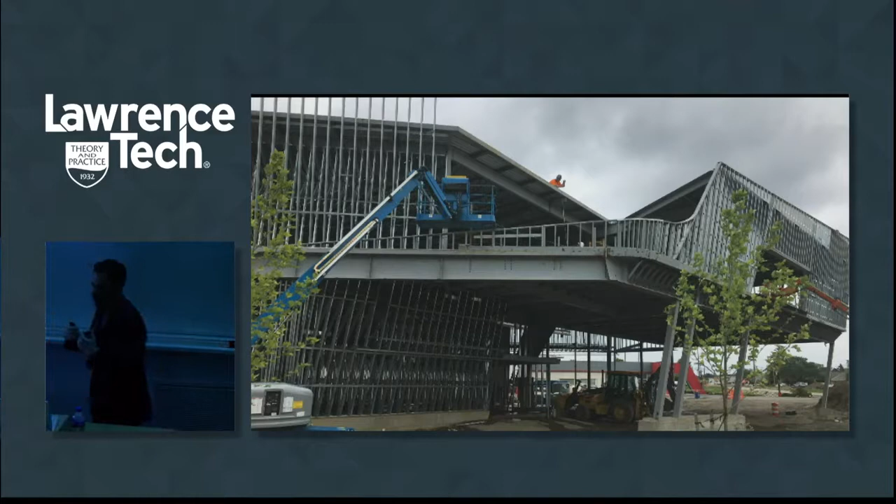Working with conventional construction, typical construction drawings—here's metal studs, they're building the sort of shape of the thing overall. It comes out, looks more or less like what was in the drawings. Then the metal panel manufacturer comes out and says this doesn't exactly match up to the skin that you had, and there's a lot of deviations, and the alignments just aren't there.

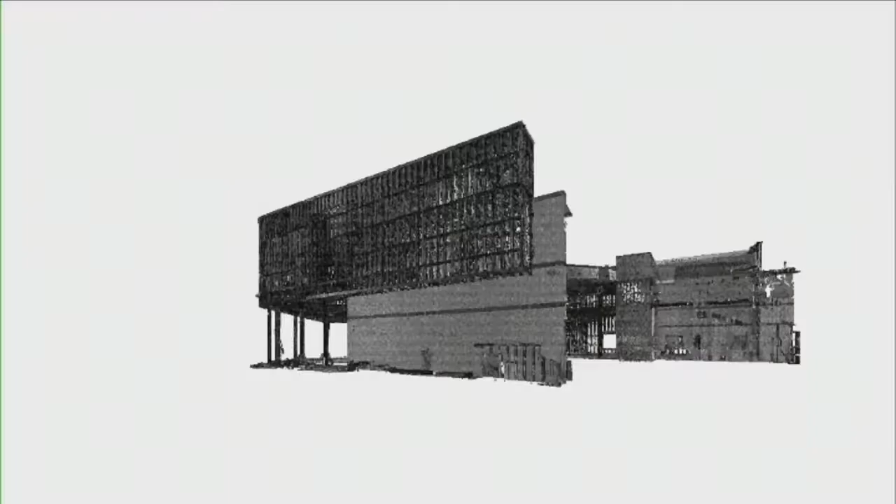From a technology point, what we found really fascinating is that they were able to come back and essentially take point cloud measurements. They put lasers in certain areas and collect data, which effectively makes this point cloud to be able to say, from existing conditions, here's a three-dimensional model, essentially exactly what it looks like in that condition. Then that 3D model comes back to our office, and we're effectively able to take the skin model we had and manipulate it to fit exactly to what the point cloud model was.

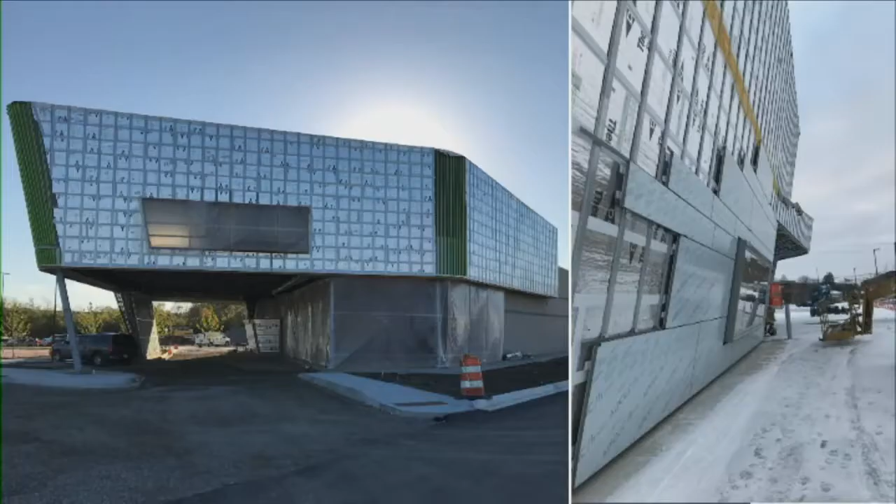In doing so, it was remarkable to see the development of this. It goes from studs, and off of the new model that was then created, they're able to make up the differences essentially in what's girders - kind of girts that come out, and then the insulation fits in between, where the panels essentially clip onto the girts. You can see the kind of tightness that's arranged here.

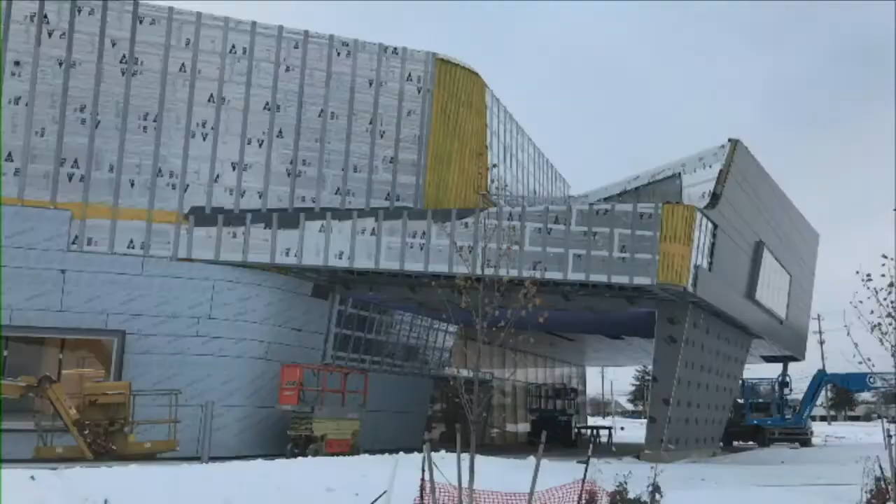What's really fascinating is as you start to look at the compound bends and where they're able to effectively deal with these - I won't say this had no budget, but when you look at some of the compound curves and things accomplished within this, probably wouldn't have been able to be achieved without digital fabrication. You can see where these things kind of bend on the edges, but how tight these tolerances are on these compound curves. Even within it, you can see some of the stress within the panels, but they're all perfectly shaped and formed, essentially straight from the digital files. So the drawings weren't necessarily created as anything more than referential in terms of the fabrication of those panels.

And this is even as recent as maybe a couple of weeks ago or last week, in the snow.

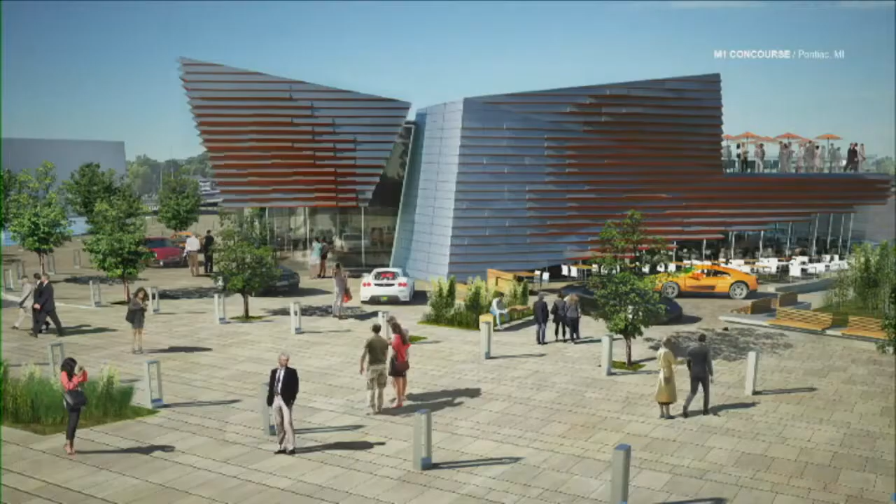The last project we wanted to show you isn't necessarily under construction, but I think this really gets at where this can go and what we're really excited about. This is for M1 Concourse in Pontiac. The interesting thing about this project - I won't go into the programming so much - but this would be a public space for an area that has car condos and a racetrack. It would be a restaurant type of use and public space where people can gather, meeting, ballroom type space within it.

They were very interested in this idea of speed and how to capture speed within the facade. So we looked at this metal panel arrangement that would have a lot of movement and texture to it. But even with these dynamic relationships, this is actually a very simply constructed box. So how did we deal with the idea of panels that were both away from the primary structure, the limitations required of that, and then the individual metal panels themselves?

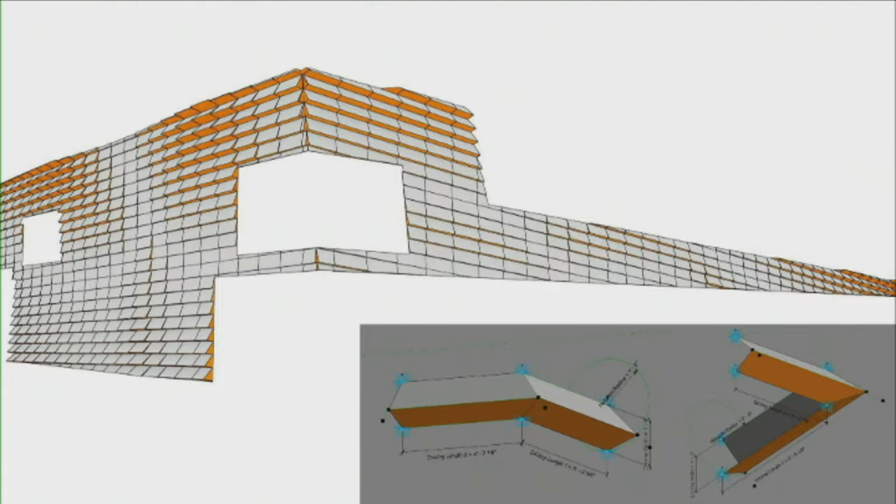In looking at that, the idea was rather than having a multiplicity of different types of panels, we would distill that down to just 5 panel sizes - flat, 2 deviations, and then the corners were of a particular nature. The corners were kind of tricky because you get this thing that doesn't look so great. Then we came back and resolved this, writing something within the script so that when it's at the corners, it sort of resolves that solution.

This is kind of the world that it lives in. I have no idea what any of this means personally - it's Greek to me, right?

This is kind of the scripting interface that computational designers in our office work with. They do an awesome job with it, and then they make things that people like me can understand, which is fantastic. There's a whole bunch of parameters, effectively from Grasshopper to Rhino, and then also from taking the Rhino model, moving it into Revit, and working with Dynamo so that it can converse effectively with Revit for the documentation side of it. So you get all of these different types of interfaces.

So this stuff that you guys are learning now, please get really good at it, because this is the future of where things are going and what makes the process of making so exciting. I just want to include this piece real quickly to give you a sense of how the parameters work for an interface that I can understand.

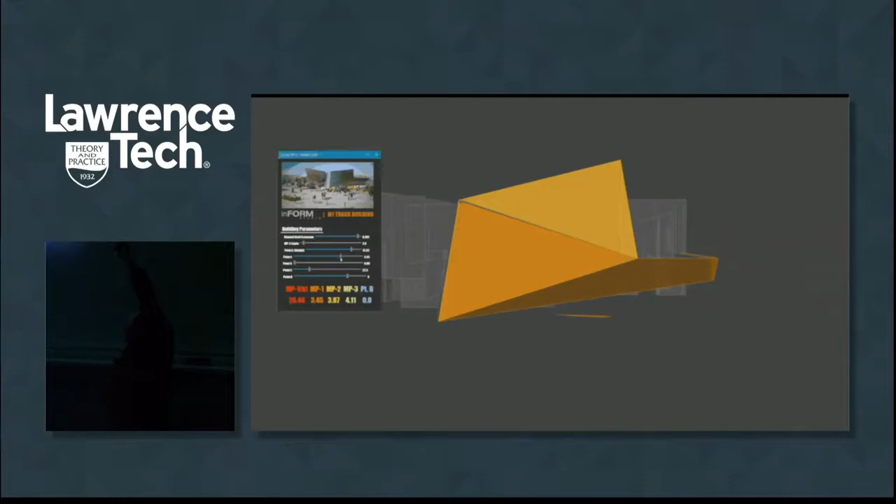Each one of these points has a particular location, and you can dial up and out. The gray that's set back within this is the primary structure. The orange can be manipulated a certain distance away from that primary structure, but never more than a certain amount of feet and inches. So we can work with the overall form, bring it back to the acceptable constraints, and get it down to the tight nuances and details of where we need it to be.

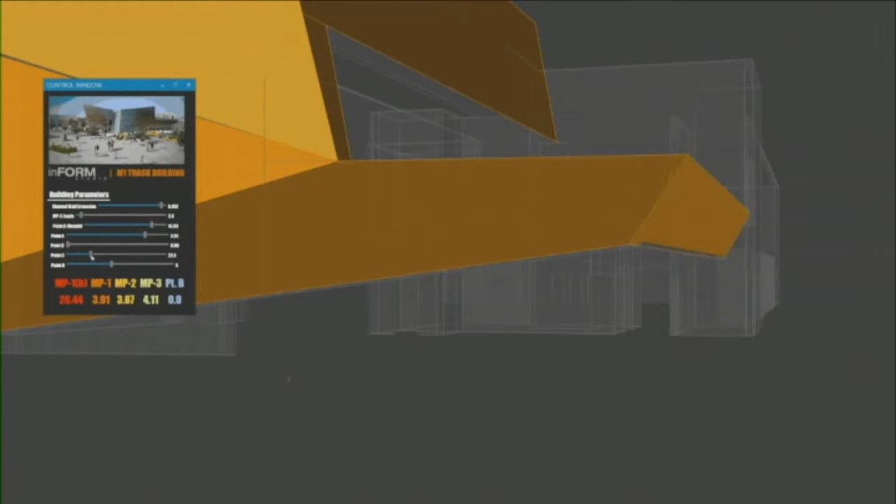Then we go to the individual panels. With the individual panels, we can have a certain percentage of each type, and we can manipulate that to give us the composition we want. At the same time, we can dial up or down any one of the types of panels, with cost control associated with all of these things. So depending on what percentage of one panel type we have versus another, we can figure out if we do more within the corners, we can do less in other areas, and really effectively deal with cost control and mediate the whole situation.

This has been so effective. What we found is that in talking to some large construction firms, particularly in Chicago, they wanted to dial this in so we could dynamically look at the cost of an entire building based on the parametrics we put into it. It's amazing to think about, because how long do we do things where we design, have no idea what the cost implications are, the contractor gets it, comes back, and you end up with this painfully iterative process, rather than dynamically understanding that information as you go. That is where the future of this really is.

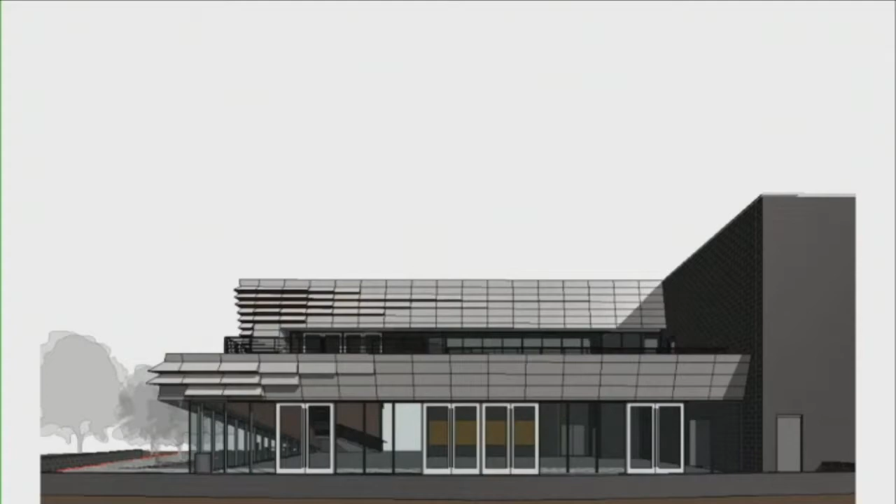Coming back to the piece we started the lecture with, what's really interesting about this, and why we noticed it, is a project we're working on known as Chroma. I think what's so appropriate about the timing of this lecture and that email is that this project is very much about the idea of a city of design.

Detroit was given the UNESCO designation of City of Design. It's the only one in the United States and only two within North America. The thought behind that is that Detroit is known as a pioneering landscape for where innovation of making occurs, everything from fabrication of things to assembly line. These technologies have always been here, it's been part of the history, and we see ourselves very integrated within that.

The other aspect is that it's very cross-disciplinary in the way it's thinking. We don't work in a vacuum anymore, we're not the architect genius over here doing this alone. You need all kinds of disciplines to collaborate together. Even outside of those, if you look at the creative disciplines, what's fascinating is there's music lab, kitchen incubation, not-for-profit making spaces, jewelers, music. You open up the ability of where your influences may come from and how people think about making in a place of innovation.